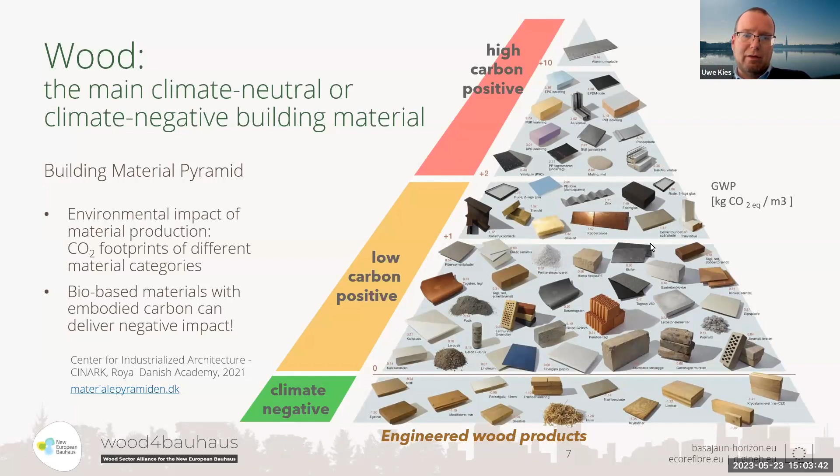So if you compare the timber-based engineered products with traditional materials regarding this global warming potential, you can see that timber products can be even considered climate neutral or even climate negative building materials. So this is a very well-known building material pyramid published by the Center for Industrialized Architecture, which really compares all sorts of materials in a common methodology.

And thinking then one step further, wood products, if we would include much more wood products in the built environment through this kind of long-life wood products, timber buildings, all sorts of products that can be integrated in the construction of buildings, then this whole value chain from forests to the built environment can become a major carbon pump. And this is the concept promoted by Professor Schellnhuber, who's the founding father or the mastermind behind this New European Bauhaus.

So the specific role and advantage of wood-based products. What you also can see on this slide is that to make this supply chain work from forestry to products and in the end the built environment, we also need digitalization as a key aspect to connect all the steps in the supply chain.

And thinking even further, here we are talking mainly about building industries and the construction sector, but to renew our cities, we also have to, sorry, there was a skip. We also have to interact with all other actors in the built environment: architects, urban planners, cities and regions, the decision makers, and so on, which is really the Bauhaus idea, that we have to co-create across a whole ecosystem in the built environment.

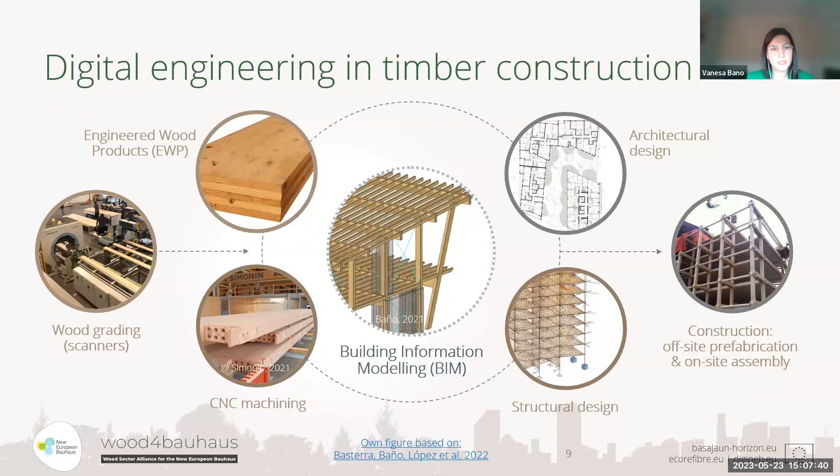Nowadays, the BIM tools designed for timber construction are also connected with other BIM or digital tools in the architectural, structural design, and also in the construction phase, and even connect with other fields such as electricity or plumbing and installations for buildings. So this is what our speakers will present today from what they usually do in their companies. Okay. So I think we pointed out a little bit the role that digitalization can play to really link all these different fields in the wood sector.

And just to come back again to this big picture, the New European Bauhaus was initiated by the President of the Commission, Ursula von der Leyen, and already in her State of the Union address in September 2020, she mentioned this phrase: "We know that the construction sector can even be turned from a carbon source into a sink if organic building materials like wood and smart technologies like AI are applied." So this really captures the connection of digital tools and bio-based materials for this green transformation.

And just to close, this statement from Professor Hans Joachim Schellnhuber: reforesting the planet and retimbering the cities, that is the goal. Timber construction is a true silver bullet for climate change.

So with this, I want to welcome again all our speakers, and we'll now open the presentations. Our first speaker will be Albino Angeli from X-Lam Dolomiti. Thanks a lot. Yes. Albino Angeli graduated in civil engineering from the University of Trento in 2005, and he has been working in the field of timber construction, both as technical manager in companies of the sector and as a freelancer. From 2005 to 2015, he was technical manager at Rothoblaas, a company specialized in steel connectors and solutions for the building and construction industry. Since 2015, he has been working at the Paterno Group company, X-Lam Dolomiti, in which he now holds the role of chairman and CEO.

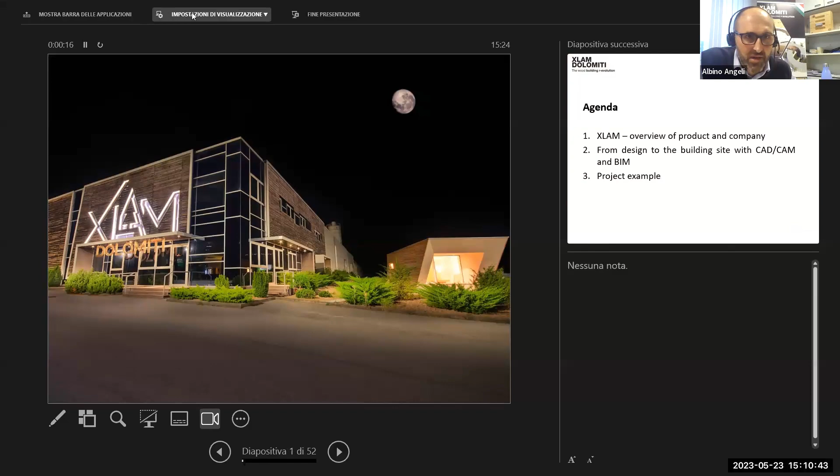Thank you very much, Vanesa, and hello, everybody. I'll try to show my screen. Okay, give me a second. Okay. Do you see my screen? Yes, we can see it, but we can also see the other slide. So, Albino, you should present most probably the second screen. Okay, I'm looking at the other. Okay. Yes, thank you. It's okay this way? Yes. Okay, thank you very much.

It is perfect. Hello, everybody. In my presentation, I will show you some examples of digitalization in some real building sites. In particular, I will give a very short overview about the company and the production of what we are doing, but I want to go immediately to showing you some real projects, designed, produced, delivered, installed, and in one case finished, like a builder, where we use the most advanced digitalization that is available on the market in this moment, I hope.

Production. We are a North Italy producer of CLT. This is our capacity, more or less 300,000 square meters. We are producing mainly cross-laminated timber. Cross-laminated timber is a panel where the lamellas are close together, and the dimension of the panel is coming from the press dimension. But after the press, the logistic issue is the main element that defines the maximum length and width of the panel. We are working with glue without formaldehyde, polyurethane glue, according with sustainability chain PEFC in Europe, and we have the CE marking according with the ETA.

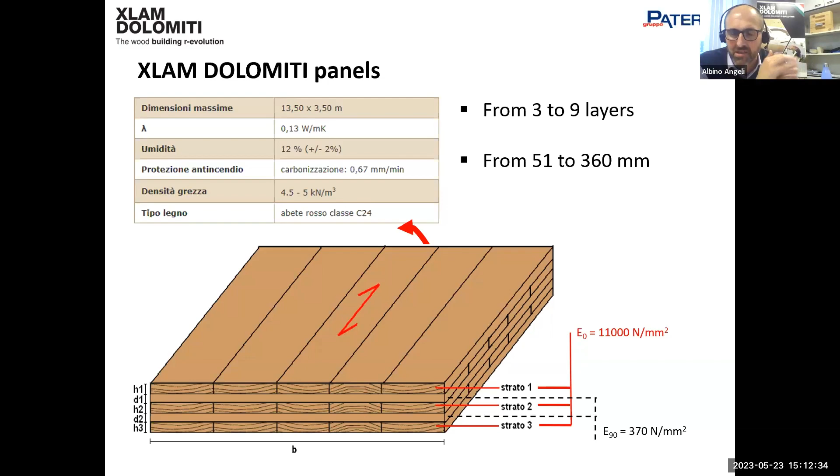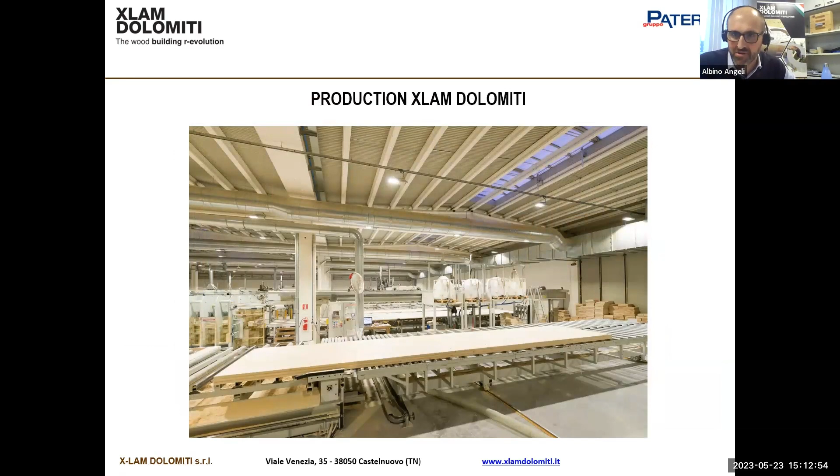CLT is a big panel from 3 to 9 layers, from more or less 51 millimeters until more than 300 millimeters, and is glued together using, in our case, polyurethane glue and a hydraulic press in the factory, and CNC machinery. And here we start talking about digitalization, starting from the CNC machinery, because all the elements go through the CNC machinery, and all the elements go to the site with a tolerance of 1 millimeter. For this, what I draw, if I draw well, is what I get on site. And I want to show you a lot of different examples.

The design. Usually in our factory, we start the tendering process, the quotation, using BIM. In our case, it is Revit, and we draw all the structural elements with, in some cases, insulation, with windows, with everything. We started to develop this in 2014, before my arriving here, to ensure that all the quantities and properties of the elements that we draw in the tender phase are right. What we draw is what the company really quotes for the tendering process.

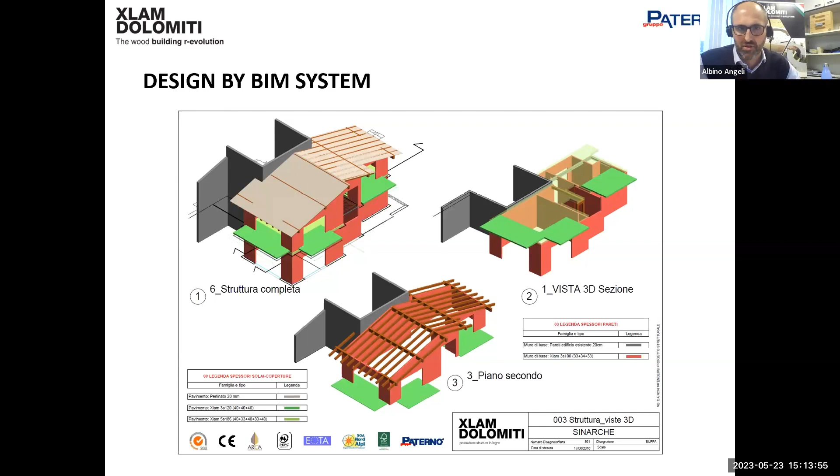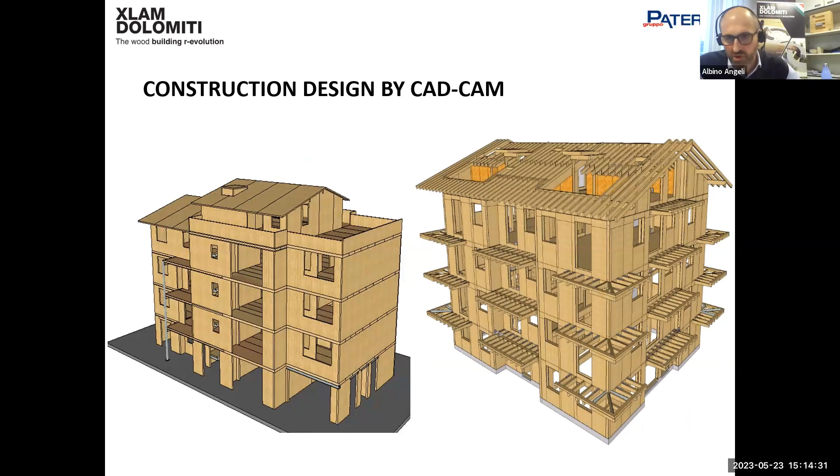After that, the structural design, the finite element model. Italy is a seismic region. For this, we do the seismic design with finite element model software. But this is outside of the BIM and outside of the CAD/CAM modeling today. It's another software that we are using, outside of what we use to draw the building. And we usually define a CAD/CAM model. We are working with Cadwork and with hsbCAD. We have 2 different software for the CAD/CAM.

And from the CAD/CAM to the installation drawing, because our system, the CLT system, is like a big Lego system on site. And like with Lego, when you play with the children, you have the information on how you have to build the helicopter or the car. In our case, it is how you have to build your house or your multi-story building. From this, we have to produce CLT panels on a rectangular element, the master panel, where the goal is to have as little waste as possible. For this, the optimization in this phase is very important: the structural engineering and construction engineering together with the optimization of the production process.

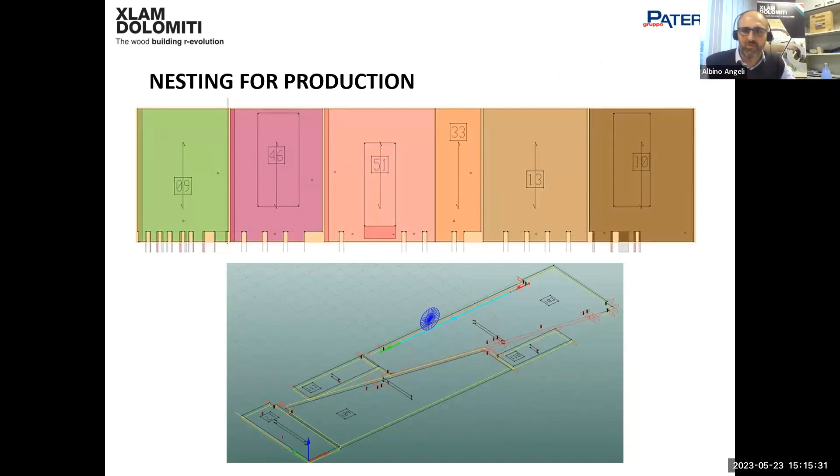For example, the first step of the digitalization, our step 0.1, was that we developed our own app, where taking a picture of the QR code that you find on the label on the panel opens the IFC file with a different color on the element you took the picture of. This is very good when you unload the truck. You have all the elements, and the carpenter and the installer can see exactly where this element has to go inside the building site space. It's not only CLT, because we have to talk about insulation, installation, windows, and everything, because every time we are managing timber, but really the building site is not only timber.

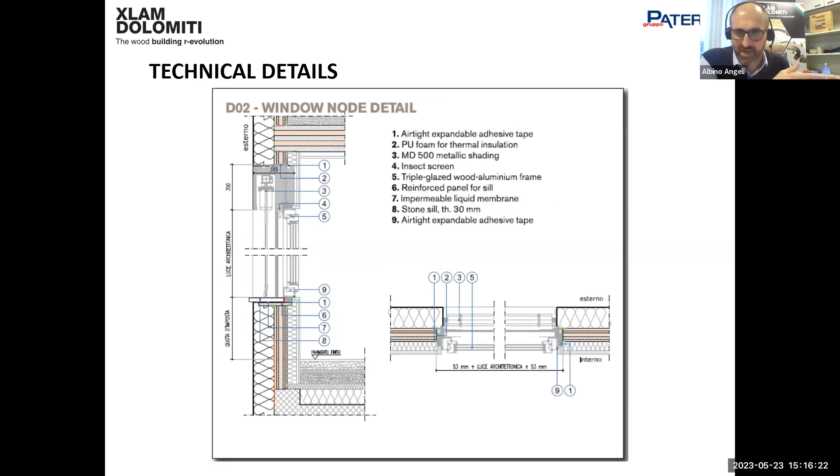And this is the focus of my presentation today, not only talking about the timber. We have to define a terrace detail with membrane, with the property of this element, how you can check on site the quality of this, how you can check the quantity, and so on.

For this, I want to start with an example that we are now on site in Trento, where in this project X-Lam Dolomiti became the builder. We are doing a full turnkey building with installation, with insulation, with plasterboard, with everything, okay?

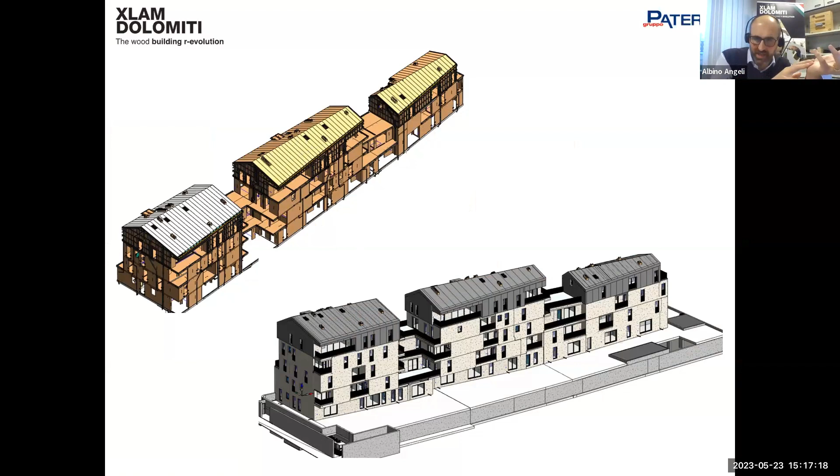And we start to develop a CAD-CAM model. With the CAD-CAM, we import to Revit, and we build all the cladding, all the installation and everything in Revit. The timber is drawn with CAD-CAM, because today there is no BIM software that can communicate very well with the CNC machinery where we cut the timber. So first we build up the model with CAD-CAM, we import in Revit, and we start to draw all the elements using Revit.

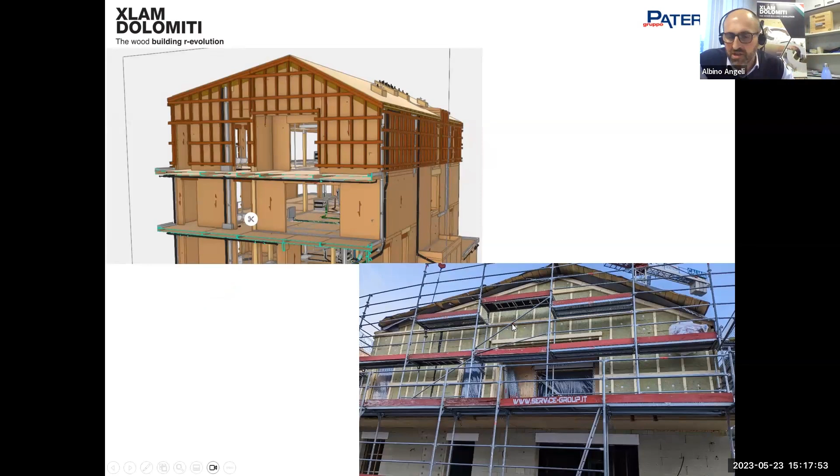Here you can see some images. You can see the installation inside, and you can see a ventilated facade with an aluminum cladding outside. You can see the image, and you can see the site. You can see, in this case, outdoor steel elements around the windows because we need some support with a metal element, how it's drawn, and what you get on site.

Okay. In our case, we found an installer that is working with Revit. So it's not only the architect, not only the engineer, not only the design team, but in this case the company that does the installation on site is working 100% using Revit. All the files to go on site are built in Revit, and it's unbelievable.

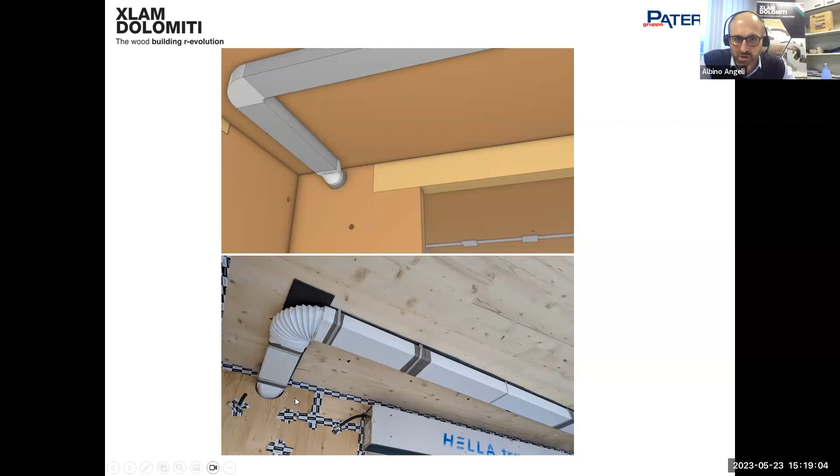You see the installer that looks at the pipe, looks before at the tablet, and looks at the real thing. They're doing the installation using a tablet and not using paper with something drawn on the paper. And you can see what we draw in the model is what you have on site. It's exactly the same. This is on the roof, down to the roof.

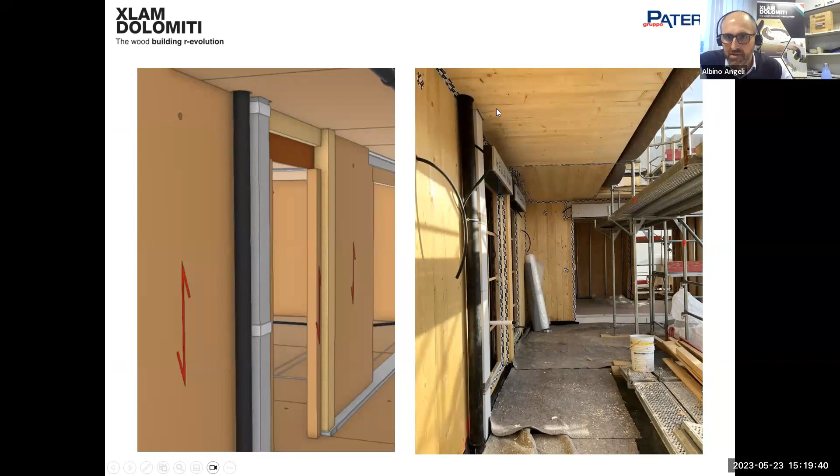There is some pipe going outside to the roof. This is the design. This is the picture of what really happened on site. Nothing was different. It's more or less 100% the same. Here you can see in the model a round pipe, a square pipe, and you can see exactly what you get on site. In this case, you see the connection, you see the hole, and you see what we really have on site.

What I want to show you is that at this moment, all the supply chain, all the actors in timber construction have to go in this direction. Because if only the timber producer is using CLT, glulam, LVL or whatever, using these digitalization instruments, but the others after on site don't use them and are not able to manage, this is today the very big limit of our technology, and where we have to invest a lot, because a lot of general contractors and installers don't use these tools. We don't have 100% of the advantage of digitalization on site.

This building that I show you now is 36 apartments that we deliver to the client finished in less than 10 months. It's not a huge quantity of apartments, not a huge project. For Trento City, it's quite a good project, with the developer, but in less than 10 months it will be finished, okay.

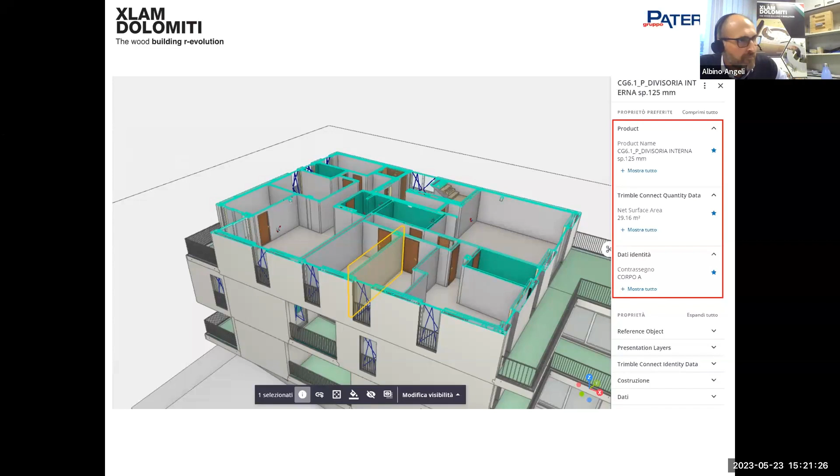Here you can see the plasterboard, all the information. When we work with the plasterboard company, we give them this file, they extract all the plasterboard walls, all the plasterboard floors and so on, with the property, the quantity, what they have to do, and that is what we ask of our supplier in this case. This is just the project that we are now on site.

I'm trying to find some other projects that we did around the world as part of the digitalization in the last 3-4 years. I was not able to find a lot in Italy, because in Italy the projects are quite small and nobody is investing a lot using BIM, using Revit, maybe ArchiCAD, or other kinds of BIM design. And many times they use it just to have a BIM label, but really they just build up a model.

For me, that is the team of architects, engineers, and the people that design the installations. But really they just do a model, and afterwards nobody follows this model. On site, nobody follows the model, so you have a BIM design, but not a BIM process from the design to the site to after the design, when you give this model to the client and say this model is what we really did on site.

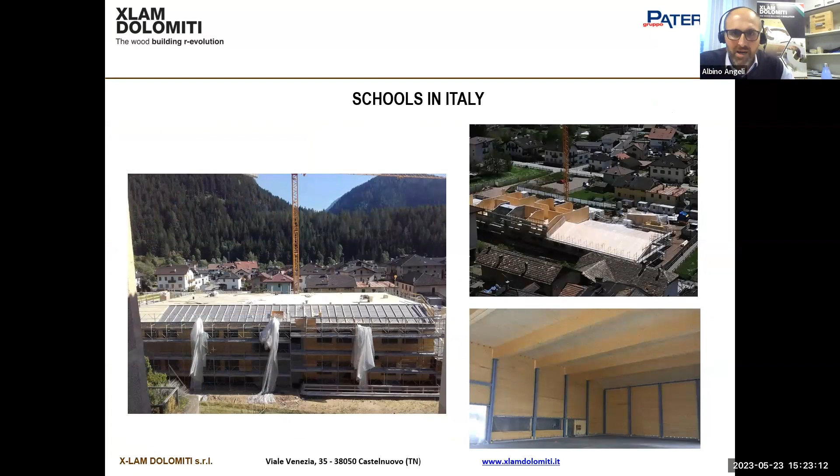What I want to show you is that the architect won the competition because it was made with a BIM design. You see the BIM design of the school. This is a very good BIM model, and they did the tender with the BIM model. When the construction company, in this case a big local general contractor, did the project, no one followed the BIM model designed before. What I want to explain is that the whole chain in the construction sector has to go in this direction. Using timber construction, it's easier to close the process 360 degrees. Using other technologies, it's a little more complicated.

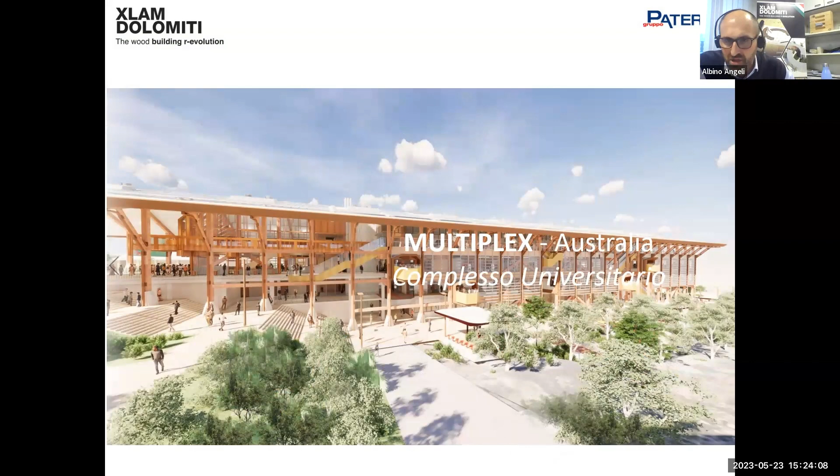Another example is our last project that we finished in Australia, a university, Murdoch University in Perth, quite a big project. We did all the design in Italy, but first we had a BIM model with all the installations inside. So it's quite easy to export all the elements and work in CAD/CAM. You can see the bracing, the glulam elements in the design, and what we got on site is the same.

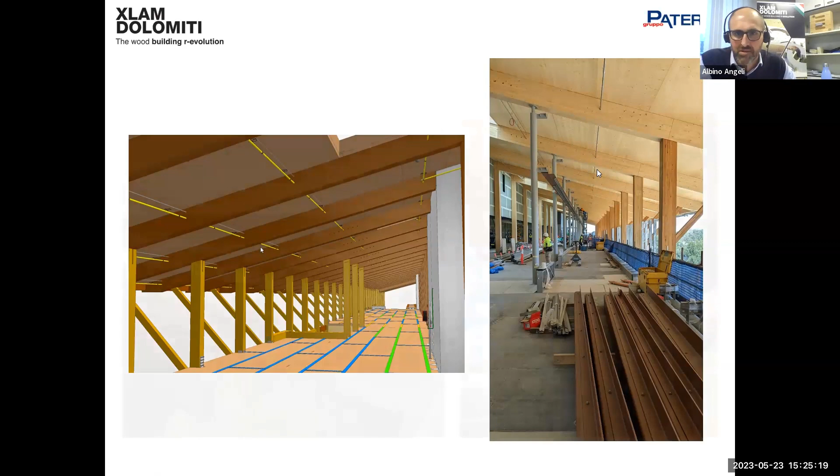For example, a very simple connection, where in the model you have all the elements, the quantity, the characteristics of the elements, and so on. For the installations, you can see the pipes drawn in our model and the picture from site with the pipes in the same position. In very big projects, in particular outside Italy, I don't know about Spain or other countries, but in Italy companies and investors use the BIM concept only for big projects. Here you can see the finished structure with all the installations we drew before in the right position.

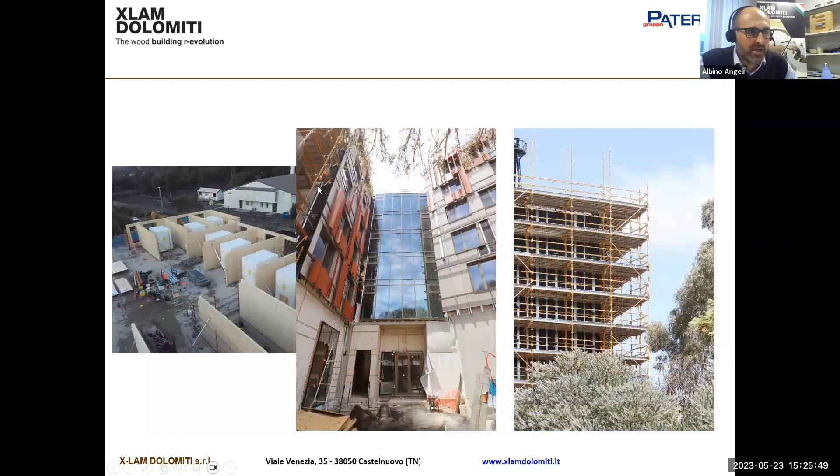Another project, in 2018 in Australia, is a student accommodation. In this case, the architect gave us a BIM model from which we exported the CLT panels for the design. We developed our whole BIM 3D model. There are some finished rooms made in Melbourne. But in this case, after the architectural design, on site nobody used Revit, nobody used this system. This was another example in Australia, 36,000 square meters of CLT.

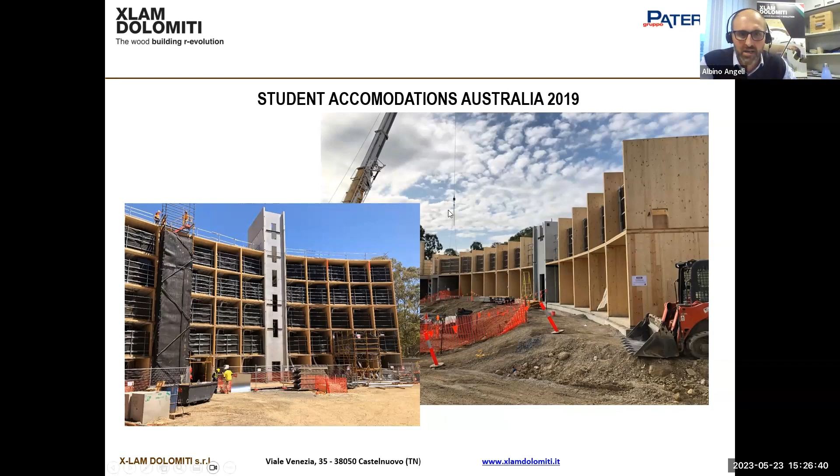In this case, the BIM model was very useful because we started from the Revit. The Revit was made by the same architect of the previous project; we already knew each other. The BIM model was made very well, and thanks to this we reduced a lot the time on site and the waste of time on site. You can see some pictures of this.

The last one is a 10,000 square meter office building. In this case it was the same. We were assigned the BIM model, and we developed all the construction drawings using CAD/CAM, taking them out of the model, in this case Revit.

Finally, from my point of view, I want to do a 2 minutes summary. What we have to develop is the mentality of all the supply chain, because the timber structural sector is already ready for this change, because we have already done these things for a lot of years. I think the first CAD/CAM arrived more than 25 years ago, 30 years ago, okay? All the CNC machinery has existed for more than 25 years, okay?

But today I'm finding on site in Italy the windows producer that comes on site and takes the sizing of the hole that we leave on the CLT panel, and doesn't believe that what we design is what they get on site. Okay, and this is a mentality for the construction sector that has to change quite fast. The timber sector can do this. If we're ready to do this, we have a very big chance in this moment. Yes, we have a big chance to explain this to all the chain.

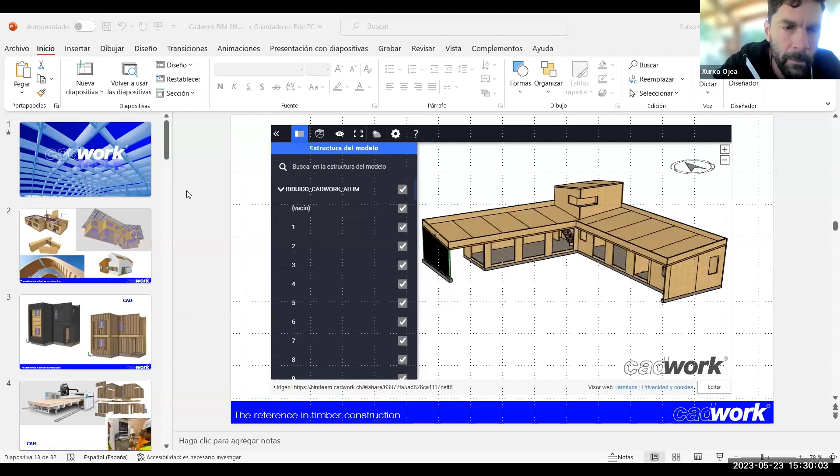Okay. So I'm going to present you a tool that Albino has introduced in a very good way. We are speaking about a CAD, CAM, BIM software specialized in timber construction. We say, what's that? What's a CAD, CAM, BIM? What's the meaning of that? It's a CAD because it's used to design. It's CAM because it's used to export to numerical control machines called CNC machines. And all that is designed using the BIM methodology. For that, we say that it's a BIM software.

In this presentation, I'm going to try to explain the reasons for the existence of a tool like this one. Why does a technical office or a wood housing production company, for example, need a specific tool for this purpose? Or what are the specific needs of a wooden construction project that make it different from other kinds of projects? We are going to answer these questions in this brief presentation.

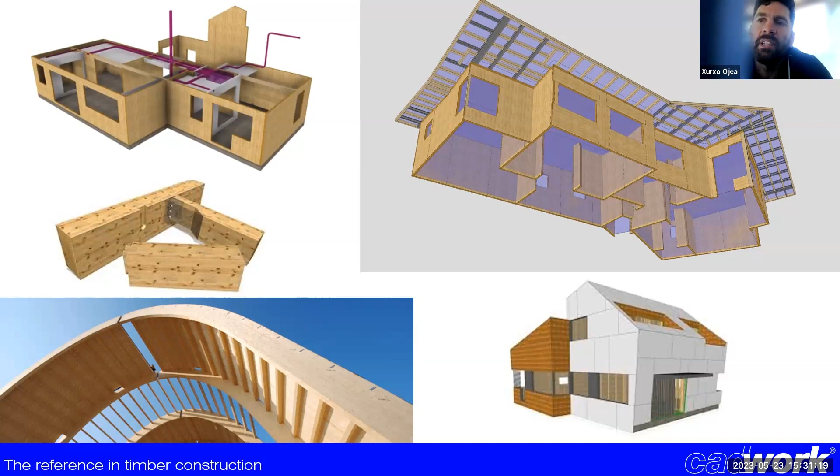First of all, we will try to clarify exactly what a CAD-CAM-BIM for timber construction is. CAD, computer-aided design, is a technology that allows automating the manual process of product design, reducing errors, gaining speed, and increasing quality. Roofs, frames, panel works, CLT, glue laminated timber structures, generating lists, generating shop drawings, all these are processes that need to be automated. In industrialized and modular construction, we will try to find the biggest degree of prefabrication possible.

What's a CAM software? This kind of software allows exporting the designs to a numerical control machine. Cadwork will export its designs to all specific timber frame CNC machines. We will show some examples later. What's BIM, Building Information Modeling? It's a collaborative work methodology for the creation and management of a construction project. A BIM software allows you to create and manage this 3D model in a very specific way, so all the agents of the project can use this same model.

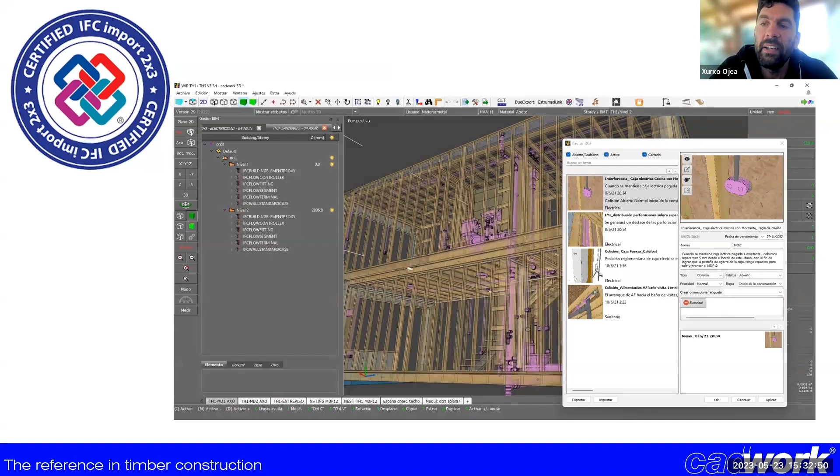I'm going to explain all this using this example. Here you can see the screen of our software, and here the example of a timber frame house. I have just activated an element of the house, a wood stud of a timber wall. It's marked with a blue arrow in the center of the screen. As you can see in the window marked with a red square on the left side of the screen, we can see directly the section, the length, and the position of this element, but the direction of its axis too.

It is very important to know the grain direction of the wood, but also its color, material, overall dimensions, which wall it is part of, which floor, which building, and with which elements it's in contact to define its ending types. For example, the joints between beams, like tenons, mortises, dovetails.

And so, knowing these values, we can know what its weight is, its center of gravity, its real volume. For example, how many pieces of this section there are in the project, how many walls, how many square meters of OSB panel we have on the first or second floor. What is the volume and price of the insulation for this project? Or how many kilos of steel do we have in the metal connectors?

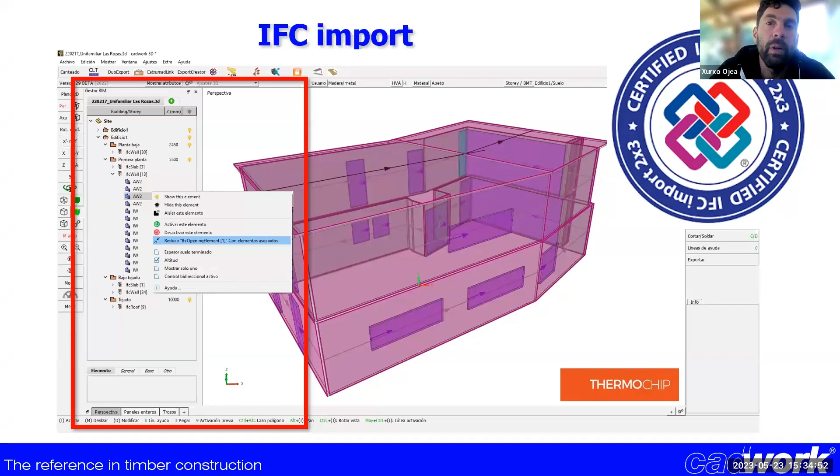We only had to shape all this information so that we were recognized by the buildingSMART association as certified BIM software. Therefore, it's enough to slide an IFC file with BIM format onto the CAD screen so that we can absorb all the necessary BIM information and begin work. Once this BIM has been imported, we begin to work.

We design to build. We add construction elements, most of them specific to timber construction, like beams, panels, plates, screws, fitting installation axes, as Albino has shown before, metal connectors, etc. All thinking about the production and assembly of the structure. This is the difference between us and a simple design software.

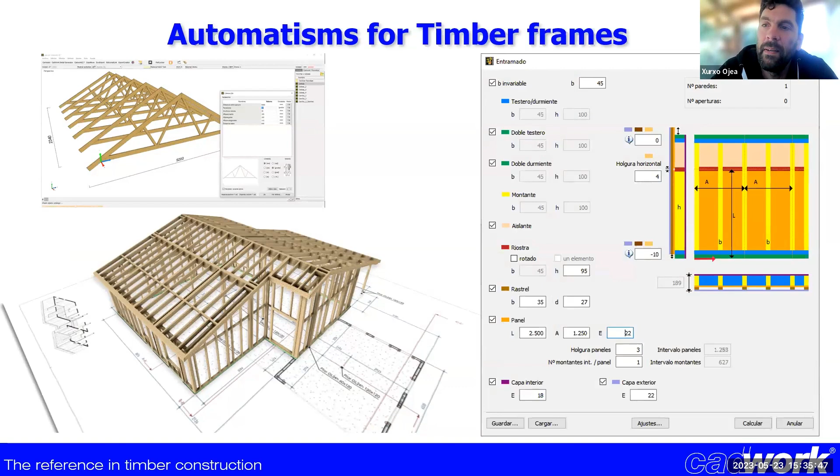For the wood frames, for example, we are equipped with automatisms for the design of the frames. For example, distance between studs, which depends on the dimension of the structural panel used, vertical and horizontal gaps between panels, whether we want to materialize the insulation or not, etc.

And since we are talking about timber structures, it's essential for us to be able to define exactly the kind of joints between elements. Wood-wood joints, like tenons, dovetails, half-laps, etc., or metal joints, like commercial metal joints, lag bolts, screws, etc. All this information will influence the production of the timber elements, ready to be manufactured with the help of shop drawings or CNC machines.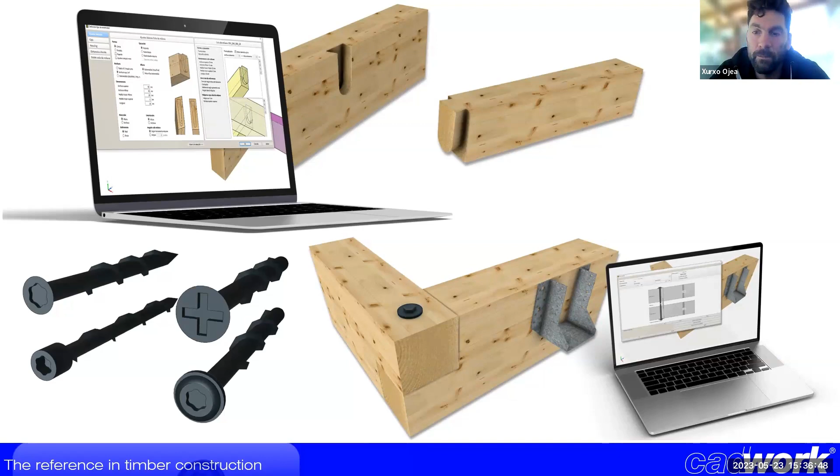Sometimes, as Albino has shown us, there are extra elements like the installations, which normally affect the elements of the construction. How? For example, some parts will have to be moved, and others will be drilled or machined by the CNC machine, and we have to measure the linear meters of installation, for example, or the machining hours.

We have already finished the complete 3D models. You can see an HTML file created from the software. And now, what shall we do? The 3D model is in my computer. How could I share all this information with all the other agents of the project? Well, we begin.

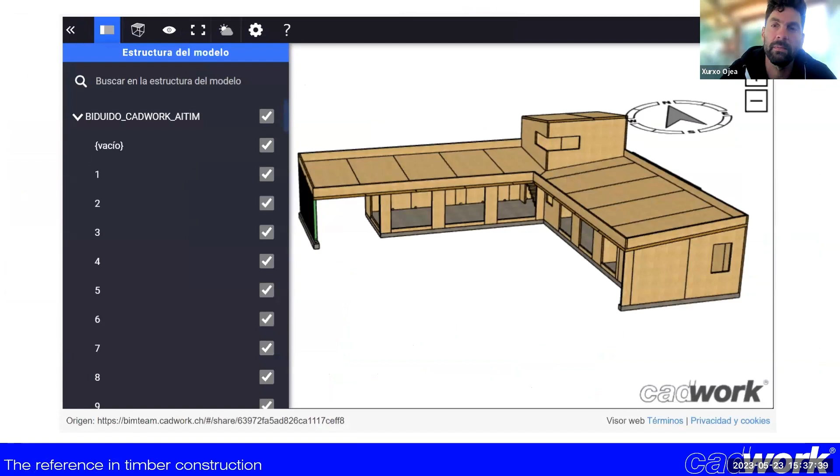Step 1. We number each element and generate the list of materials of all the elements that we have designed. Linear meters, square meters, cubic meters, kilograms, units, prices, all are in lists ordered by sections, materials, walls, height, buildings, stories. We even need to know the list of raw bars we are going to need to obtain a minimum waste of wood, for example.

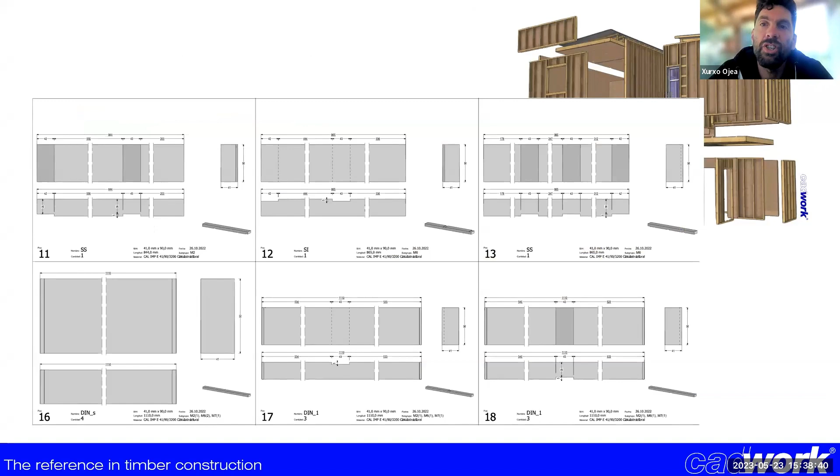Okay, we already have the number of pieces. Now we need to manufacture them. We obtain the exploded views, a shop drawing of each piece, fully dimensioned, with all its cuts for its manual manufacture, or a shop drawing of each wall, also automatically dimensioned, with all its layers if we are speaking about a framed wall, or a shop drawing of every CLT panel, or even a plan of each facade or of each assembly group.

And as Albino has told us before, for CLT panels or other kinds of panels, we need a nesting calculation. What's that? For certain dimensions of raw big panels, called master panels, we will need to put the project panels into them, so the waste will be as little as possible. In this way, we will really know how many square meters of panel we have to manufacture, and the order to the CNC machine will be done.

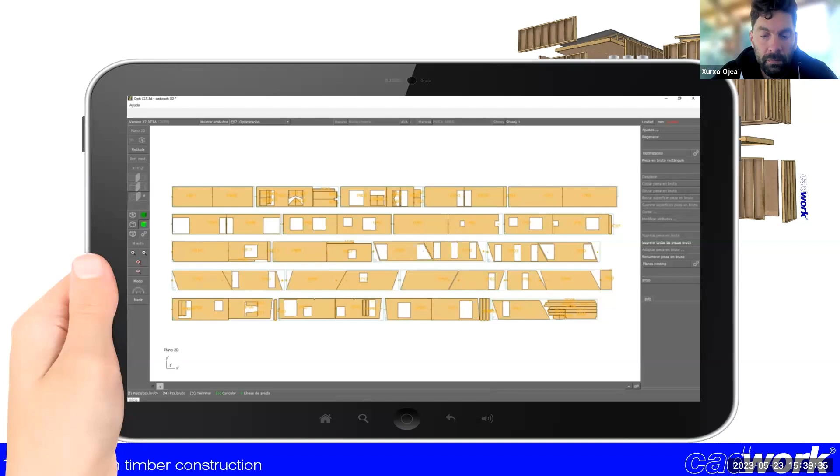And of course, the assembly plans are essential. We have already manufactured the beams and panels, and now we have to put them together with the help of these general shop drawings.

But there are more extra and necessary tools. We need to know, for example, for the CLT panels or the timber frame walls, which are the anchor points for the lifting in the manufacture or in the transport and unloading on site, depending on their center of gravity. That's what CADwork takes care of.

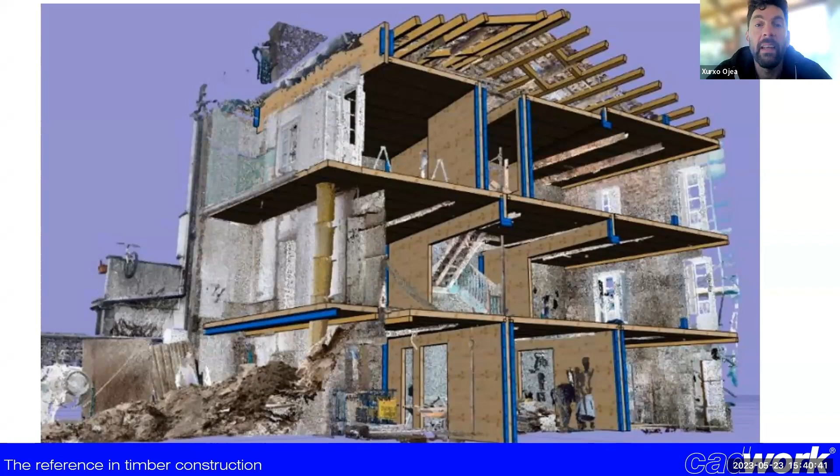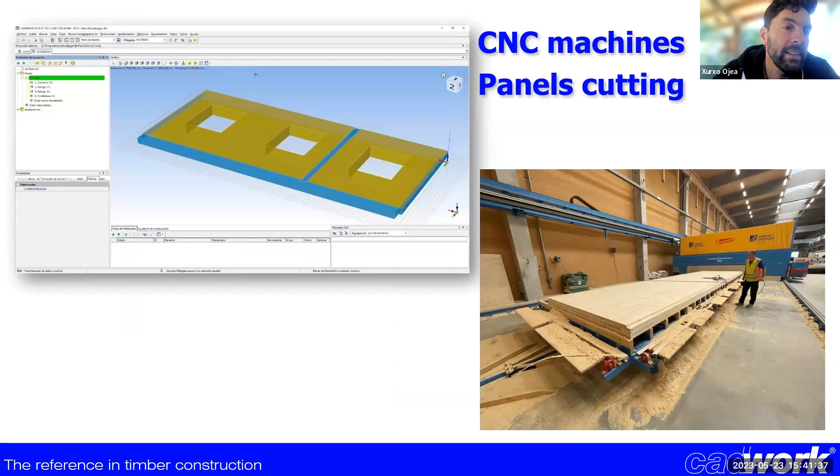Second, CNC machines for cutting panels, normally CLT panels, designed specially for machining large panels or curved, even laminated beams. A third type is called multifunctional bridge, or CNC machines for the assembly of timber frame walls, of which there are more and more in Europe.

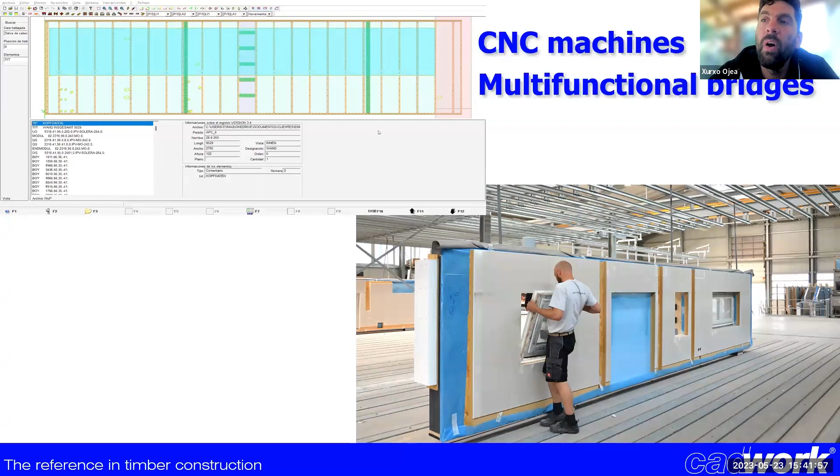CADwork is in charge of telling the machine software where the pieces of the structure go, how to place the panels, how to make the perimeter cuts and the cuts of the doors and windows, with what tool, etc.

Okay, with the finished and machined structure, it's time to load the truck, for example. If they are bars, no problem. But what happens if they are big CLT panels? There isn't so much room anymore. CADwork has a tool that loads the elements onto the truck. You only have to give the dimensions of the box, decide in which position the elements are going to be placed, if they are standing, lying down, etc., and if we want to group certain elements or not.

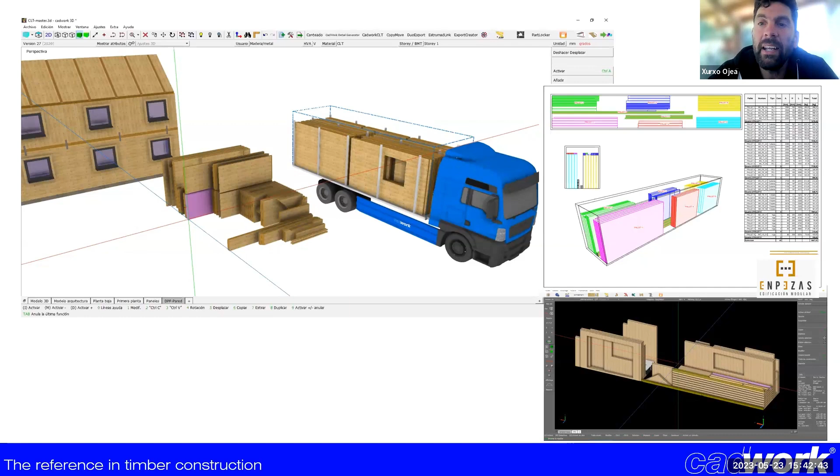To transmit this information to our customer or to the assemblers, we can use the HTML format. These files can be opened on any device. We can add an assembly diagram step by step, and we can read the QR code of any part, as Albino has shown us, and obtain information about its position in this simple model.

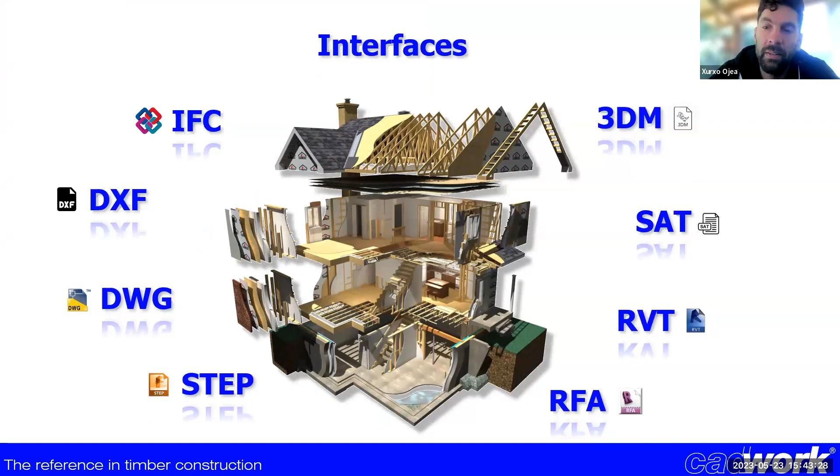We need to export and import to almost any 3D and 2D format, not only to the IFC format, but to many others. The most common are on the screen. Don't forget, we are working in a BIM system, so we need to export our model to the IFC format, so all the agents of the project can use our work.

We can export our model selecting a defined level of detail. So we can decide, for example, if we want to show or not the end types, tenons, mortises, or dovetails, or if we want to show the nuts and washers of the bolts, etc. Rhino inside CADwork is a tool that allows us to embed Rhino 7 in CADwork 3D, so we can take advantage of the surface model in our CADwork 3D environment.

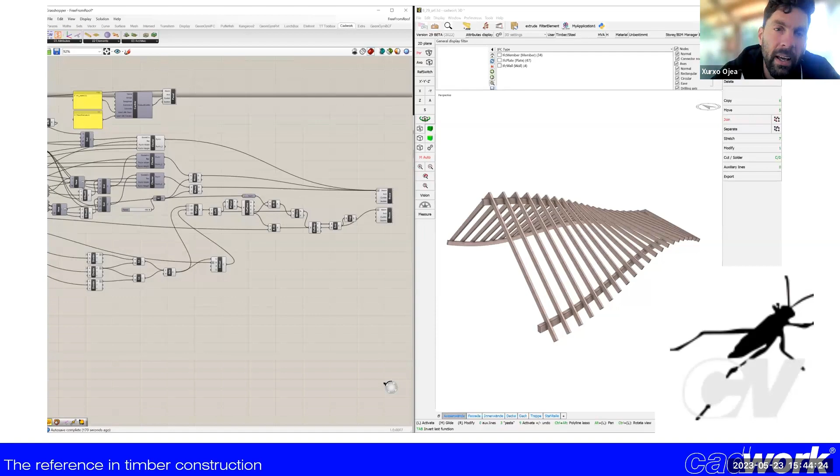In short, wood construction predates any other kind of construction. It has never stopped being built with this material, and it seems that in the future it will be used more and more. Tradition and technology come together in each of the wooden projects built this century. Building in wood is building the future for our children.

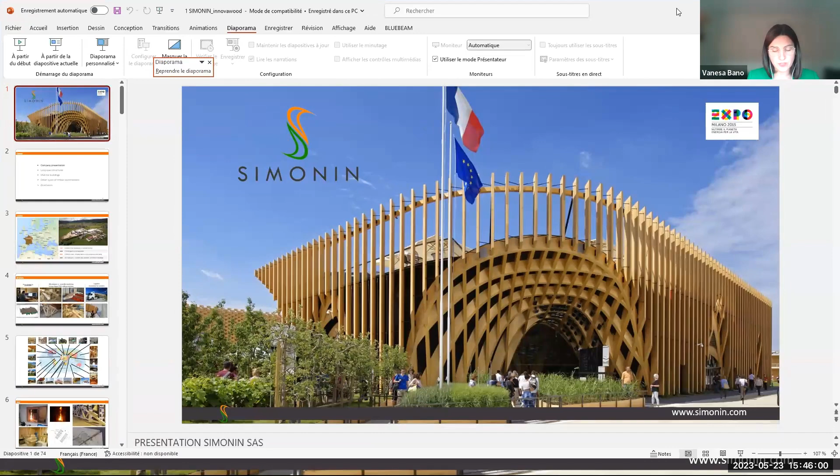And now it is the turn of Jannick Jahnke from Simonin. He's a timber engineer with a passion for timber who began working in the industry over 10 years ago. His fascination with wood has led him to pursue a career that incorporates both his expertise in joinery and his background in timber engineering. As a structural engineer and technical sales professional for Simonin, a French glulam manufacturing company, Jannick has found the perfect outlet to combine his mastery of precision joinery techniques with his knowledge of building structural analysis, which he gained during his master's degree in 2016 at École Supérieure du Bois in France.

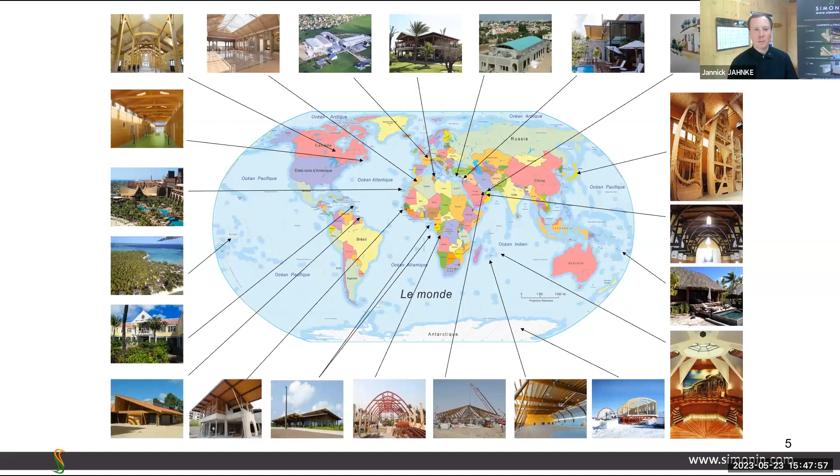Simonin is a company which is based in France and exports all over the world. Here I've got a few examples of projects which have been built in the past. When you do such kind of projects and especially ship them all around the world, you expect the materials to be of quality and to last where they should and how they should. That's why research and development as well as quality control are central items.

For curved pieces, the process is pretty similar. You use thinner lamellas, which are then bent, shaped, and glued to get the special shape and curve.

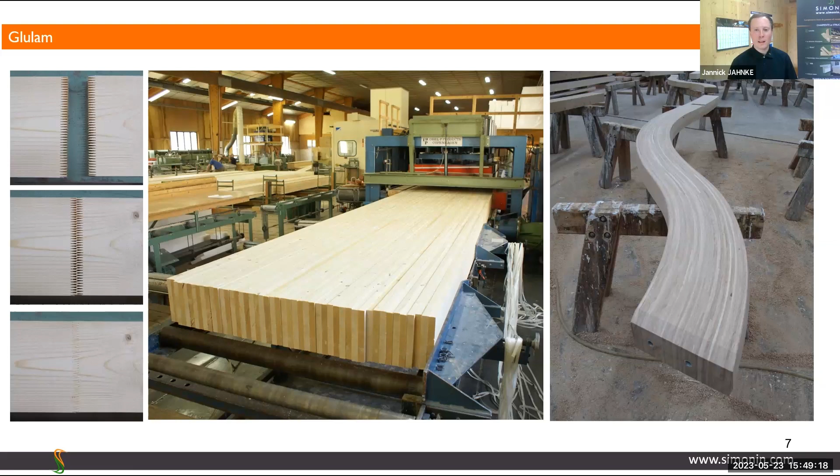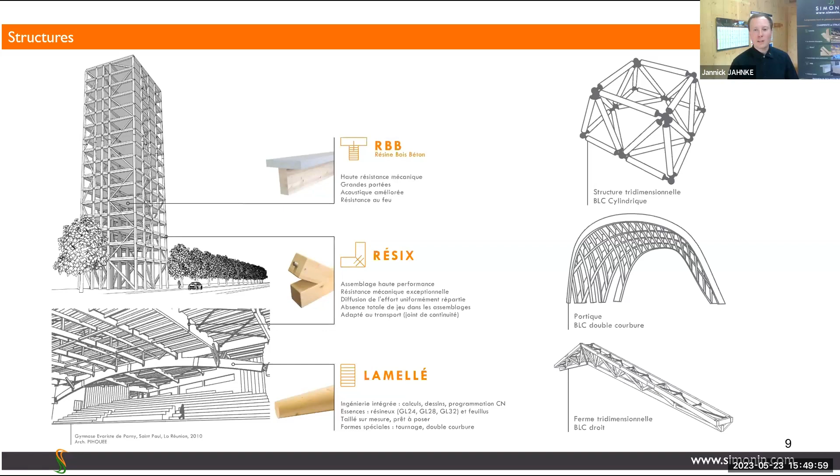Of course, in timber, there's always one topic, which is fire. That's the first question which is usually raised. And in fire, there are 2 things to remember. There's the fire resistance, which is counted in minutes, and the spread of flame, which is how a material behaves in case of a fire.

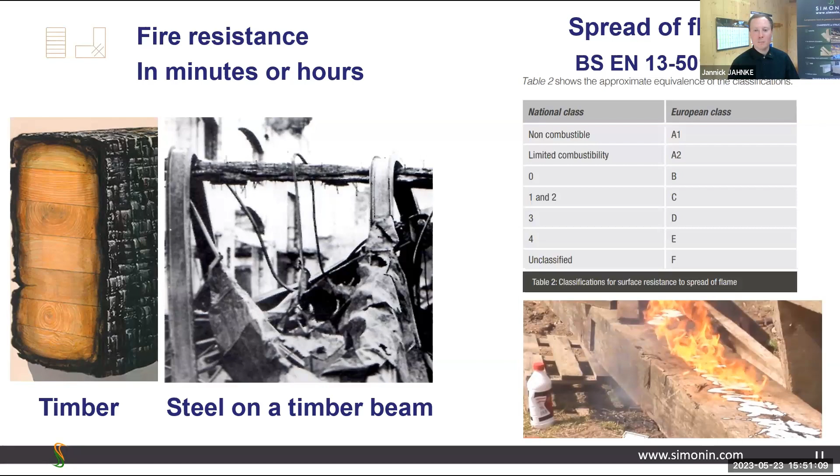On the right side, it's something else. It's the spread of flame. It's the Euroclasses, which say how a material behaves in case of a fire. So, for example, A1 is steel, which is non-combustible, and timber is between D and B, according to the treatment that you apply on it.

So when you apply that on a building, you've got, for example, a timber floor and a timber ceiling. You want this timber ceiling to resist so that when you have people on top of it, it should resist for, for example, 1 hour. That's what you can calculate with the charring layer on a timber beam.

And then you've got the cladding on the wall, where you're looking not for resistance, but for spread of flame. That means how will it react in case of a fire? Will it ignite or not? And that's something we can achieve with treatments or natural products such as larch or the timber species.

From fire, we will also go to a type of connection, the glued-in rods, which is a type of connection which is embedded into the timber. As we've seen before, when you have a piece of steel, in case of fire, these ones are losing their resistance, whereas when you embed the steel in the timber, you use the insulation properties of the glulam and of the wood to protect the steel connectors inside of the material.

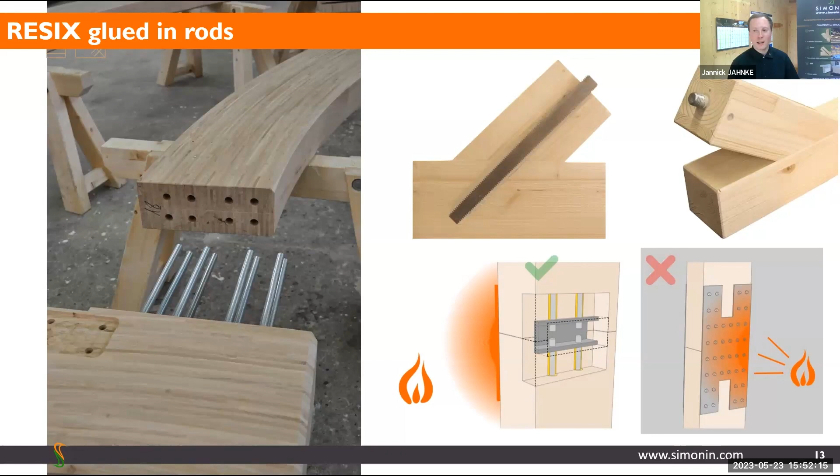Other advantages of the glued-in rods are the pull strength, their water resistance, and the versatility of uses you can have with them. So Simonin uses them quite a lot for export purposes, because we can produce small elements which fit into a container and can then be shipped all over the world to a final destination and assembled on site using simple steel screws, steel on steel.

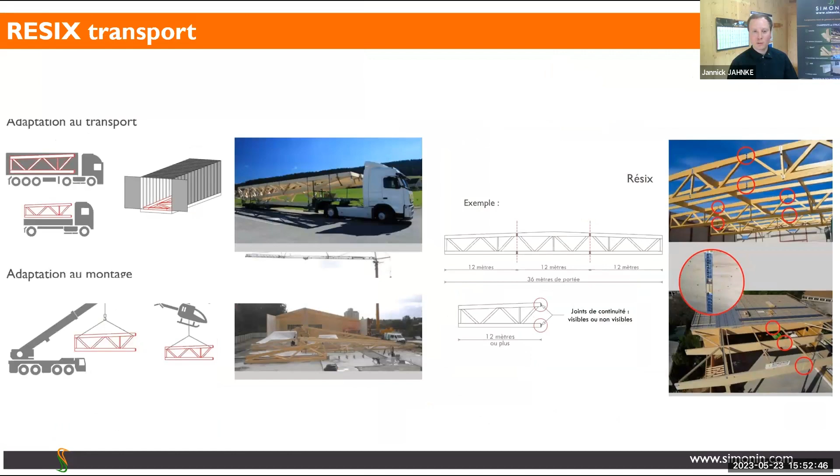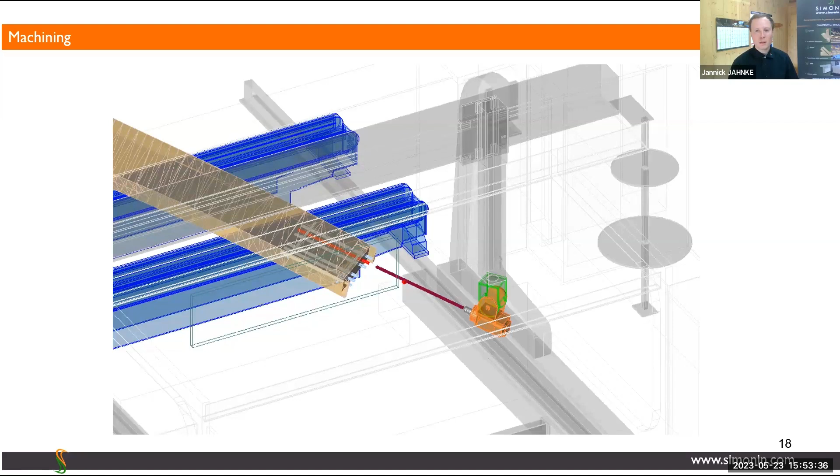Let's move on to the first topic, which are the long span structures. As in every process in the timber industry, everything starts with the 3D model and the BIM software. So all pieces are drawn in the software. Then from there, they're exported on the CNC machine, where we estimate the time of machining and simulate everything. Once the simulation is done, we go to the workshop. Here we have a CNC machine with the capacities. Everything is programmed before and executed on the machine with a precision of about 1 millimeter.

Once every single piece is machined, we move on in the workshop to the part of the assembly, where we have pre-manufactured pieces. That means we will arrive on site with elements as big as possible, as shown with X-Lam Dolomiti, with prefabrication in order to have a good precision. That's what we aim for. And once we assemble everything, we can get structures with a span of up to 80 meters very easily. This span can be achieved with curved structures.

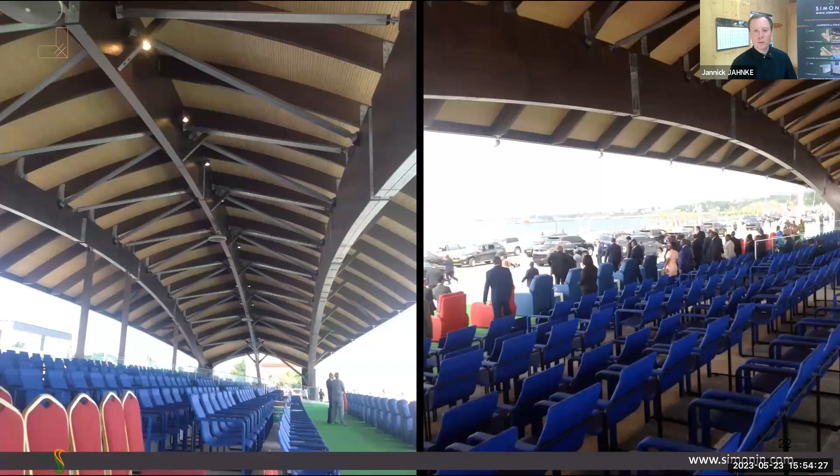From a technical point of view, they are very efficient to cross long spans. So they have a lot of horizontal push on the concrete foundations right and left. That's why they needed to embed steel rods in the floor to hold back the right and the left foundation, to take all the horizontal efforts brought in by this structure. On the right side, we can see the steel connectors, which allow to assemble the 12-meter long beams, which were shipped by container and assembled on site to get the 80-meter arch overall.

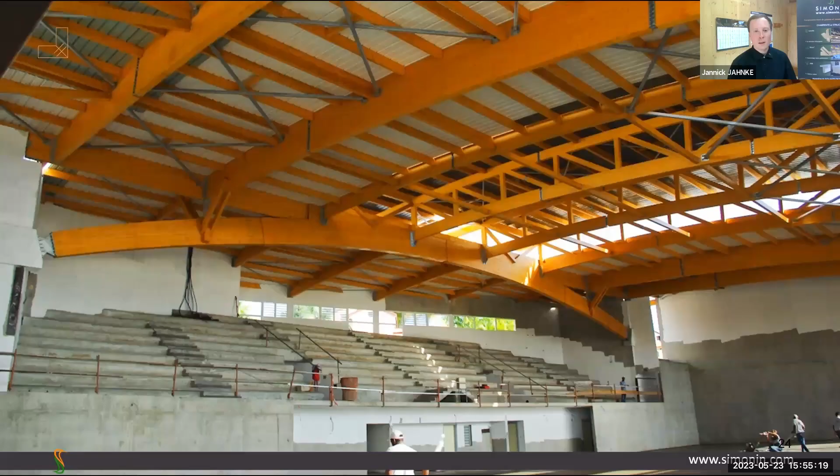Then you can say timber construction has nothing new, and that's what we can see here. That's a building of the 1980s, which has also an impressive span, spanning from right to left with more than 40 meters. Here again, the curves are really useful to have long spans and a lot of compression on the right and left side. This can be used in sport halls, such as basketball halls. This one is in Lebanon.

This building was also made out of timber arches. And here we have an example. This building burned down, at least it didn't burn down. There was a fire inside. The timber has resisted during the time that it needed to resist because it has been designed to. And you can see small steel strips of the steel sandwich panel hanging from the ceiling, but the main structure was still standing and today has been replaced by trusses.

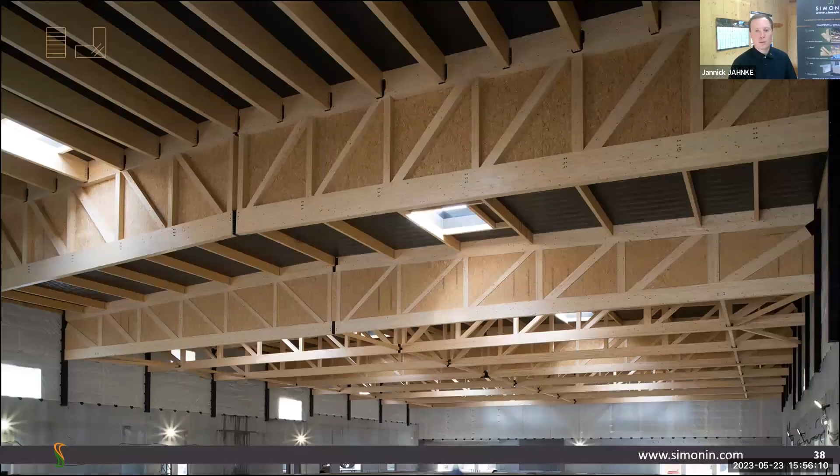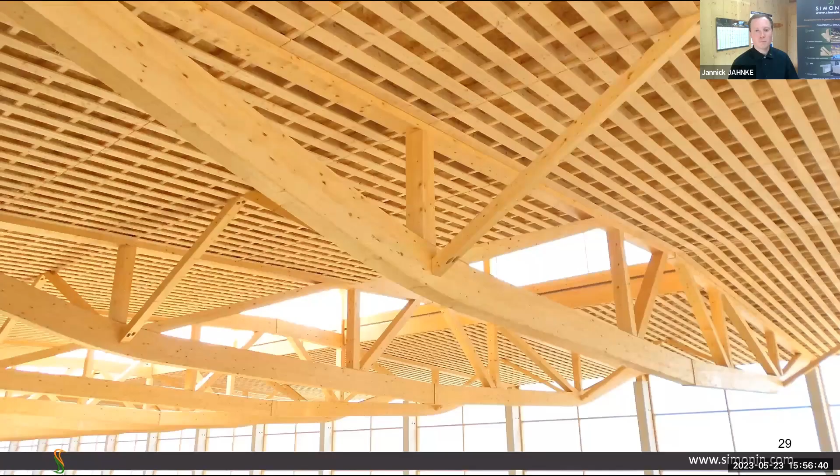These trusses are another useful way to span if you want a flat roof or almost flat roofs. We can span 38 meters using 2 trusses of about 20 meters, which are jointed at the center on site. Another example is this one for a fire station. So firefighters really love timber in some places because the resistance in time is pretty impressive with 1, 2, or 3 hours, according to the design. That's the finished structure with a span of more than 30 meters.

We've got other examples of uses to have long spans with triangular structures. They look really lovely once you have installed a glass roof on top of them. Here we can see the connections, which are all done in the factory and off-site. So this is made in the factory, all assembled, shipped as long elements, and assembled on the construction site to form one truss.

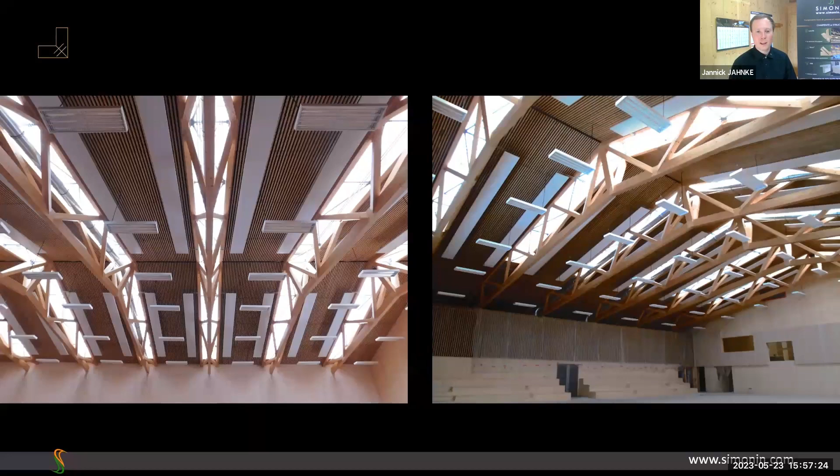And here we have the finished result with the lighting on top of it. Here we have something else with, again, 2 trusses assembled for transport reasons, for a horse arena.

So now we've seen that we have many examples of buildings with quite long spans, from 20 to 80 meters. Above 40 meters, the curved design is pretty helpful, and below 40 meters can be handled with trusses. Once we have the span, there's another topic, which is the overhang. This is also sometimes called cantilever.

So here we have a structure which has 15 meters overhang from the post to the end, and which should resist the vertical forces which are going down, and also the uplift, which is an impressive thing to calculate on structures, because all the connections have to be calculated for vertical loads downwards and vertical loads upwards. That's the inside of the building.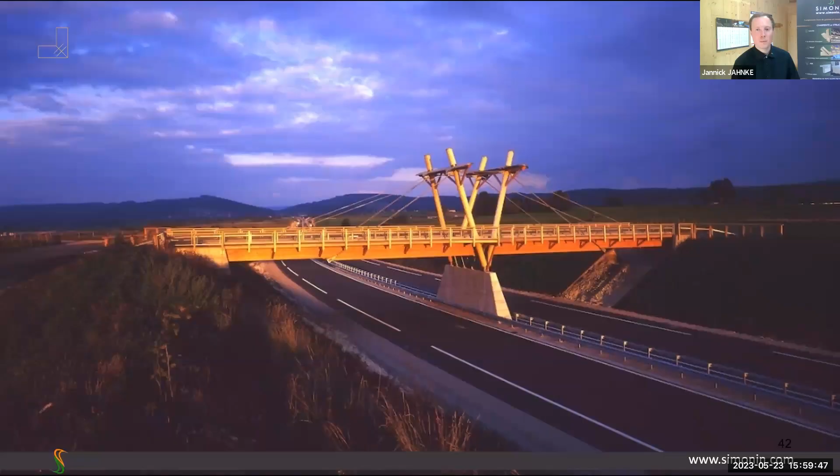Durability in timber is another topic. That's why the bridge is covered, and covered items will have a long resistance and long durability. Here we have an example of a bridge which is designed to support trucks. So it's crossing a highway, and you can drive with trucks on top of these bridges.

Now we've seen structures which have horizontal spans, and we can also apply the same thing vertically with observatories, which have a height between 15 and 30 meters. And the idea is pretty similar. Instead of being horizontal, the beams are vertical and support the same conditions of stress with bending.

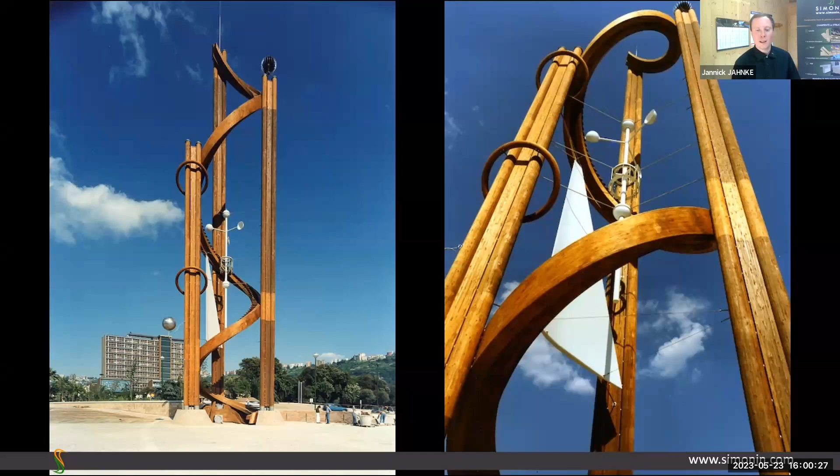Here we have an example in Italy. It was built for the World Cup in Italy in the 1990s, still standing, a large structure. Today it's not this color anymore, it's gray, but it's still standing and doing fine. So if one day you go to Napoli, you can see that in front of the football stadium.

The other topic was the mid-rise buildings. We've seen the towers, and now we'll see this applied to other structures. So we're going to make a difference between the medium-rise buildings and the high-rise. Sometimes people talk about high-rise, but 12 to 39 floors. There are a few buildings in timber going above 10 floors, but usually we're between 5 and 10. That's something where timber is really used, and that's common today in the industry.

The ways to build these projects are different depending on the height and the construction methodology. So we've got the exoskeleton made out of glulam. We've got the CLT, as Alberto showed before in the presentation, posts and beams, and also sometimes concrete cores, which provide the stability of the building.

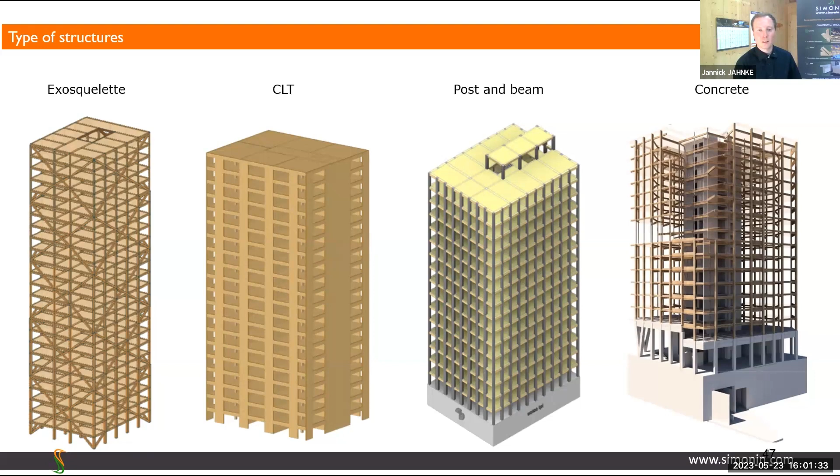One typical way to have the floors made is with CLT, as shown in the first presentation. And then we've got the walls, which can also be made out of timber frame, which makes them a bit lighter and thinner than the CLT versions. I found a map of high-rise or medium-rise buildings which have been built over the past years or which are in projects. As we see, it's something that starts to be common, and I guess in a few years we're going to have some more spots all over the world.

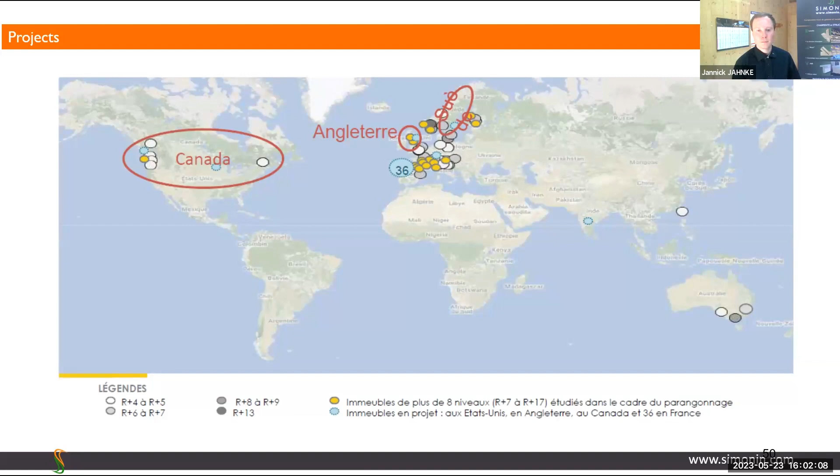One example could be the police station of Monaco. It's not very high, it's only 4 floors, but standing on a timber structure that is more than 10 meters high, to have a road passing underneath, because in Monaco they have really huge space problems. So they start building on the roads, and that's a temporary police station that will be used for a few years while the old one is refurbished.

Simonin has participated in the floor structure or the ground structure, which is built entirely out of glulam, with glued-in rod connections and a fire resistance of 90 minutes. That has been achieved with the charring layer and an additional protection with a timber panel where the steel connections are, to protect the glulam with an additional layer of timber at these places.

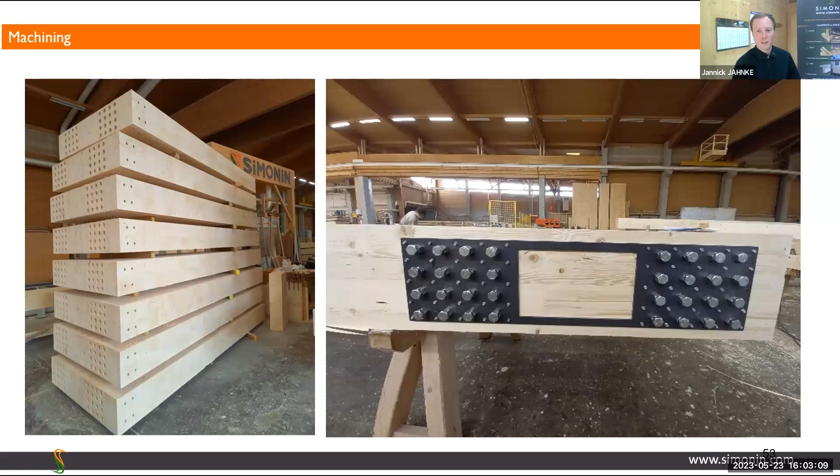Here we've got an example of the beams which are in the factory, with all the glued-in rods which will be injected at all these places to have a moment connection and stiff portal frames. One portal frame can be seen here and installed on site. That's a picture of Ossabois, where they've produced the timber modules which were then installed on top of the structure.

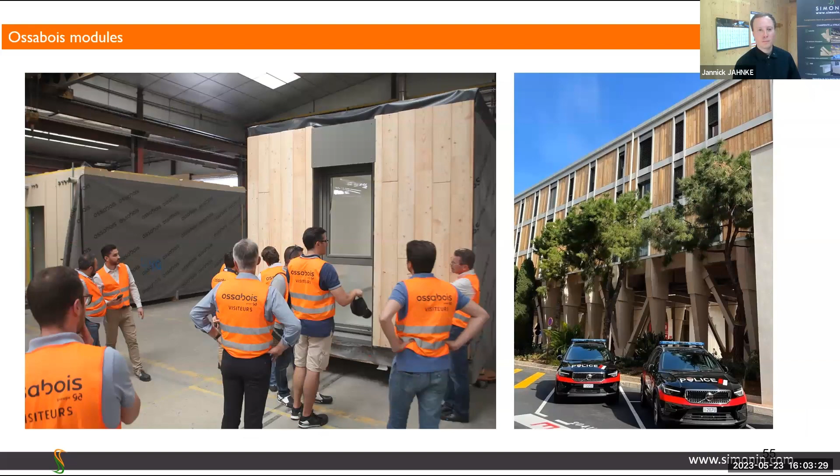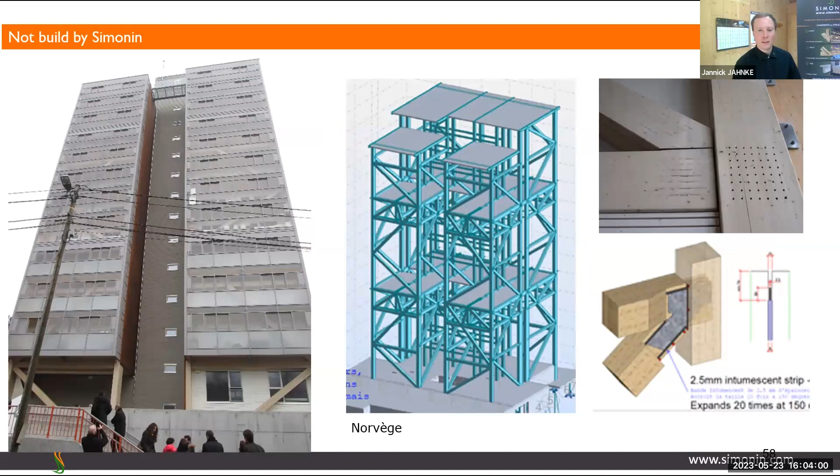Another example, again in Monaco, usually mid-rise buildings are used where space is rare, so this is a good place to be. In Monaco, they are now building another one, which is under construction with a post and beam skeleton. A bit like the Treet in Norway, which was one of the first ones. This was not built by Simonin, and all the bracing is done with timber beams and steel connection plates, as you can see on the right side. It works a bit like the trusses I showed earlier. You can use the trusses horizontally, and you can use them for bracing vertically.

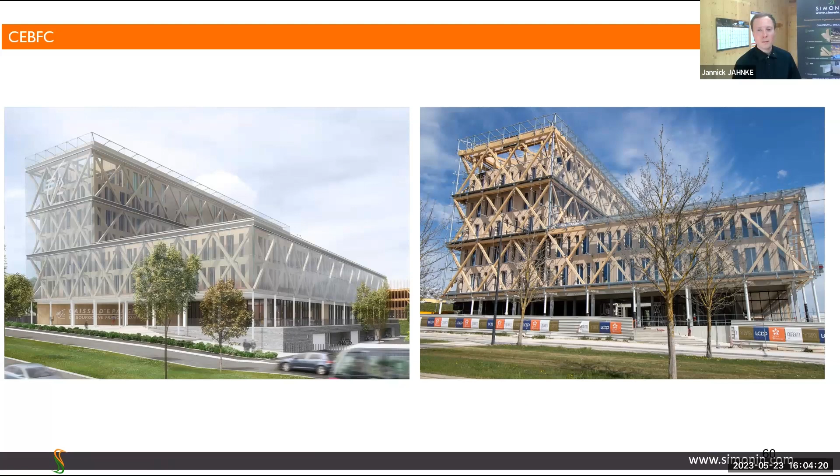That brings us to another project, which has an exoskeleton. All the outside is braced with timber. And that's a bank in Dijon in France. So we have bracing of the facade done with timber and concrete staircases, which are used also for bracing the overall building. The overall building is made out of a timber structure, timber beams, and some CLT slabs on top.

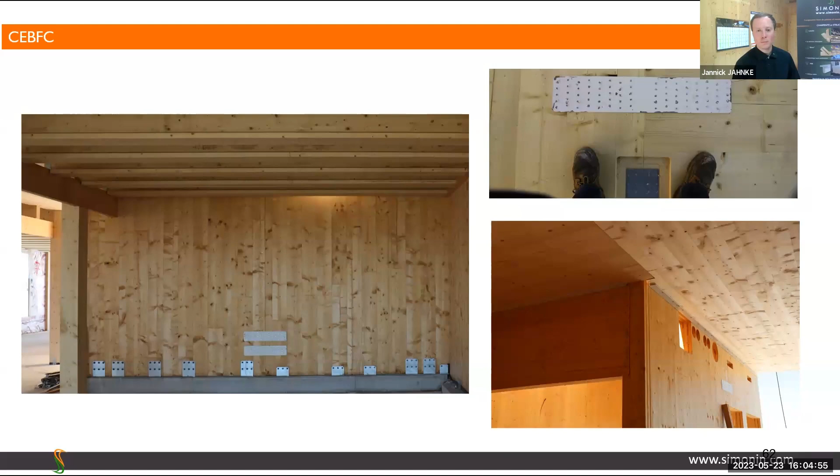Here we can see what has been shown before. All the connections are designed on the computer and installed on site. Here we've got all the steel connectors on the left picture, and also all the holes for the ducts and pipes, which are made in the factory on the bottom right picture. That was the building under construction and the inside once finished.

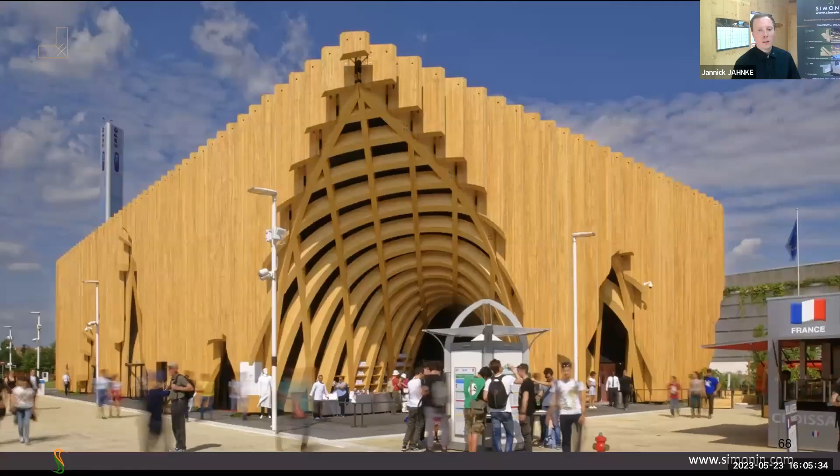The first picture of my slideshow was the French pavilion, which was used for the Expo in 2015 in Milano. This was a nice building. It has won the first prize of architecture of the show. All made out of timber with 3 floors. So I would not even call it a mid-rise building, just 3 floors. And it has something special. We needed to have 2-hour fire resistance so that the upper floors and restaurants could be evacuated in case of fire on the lower level.

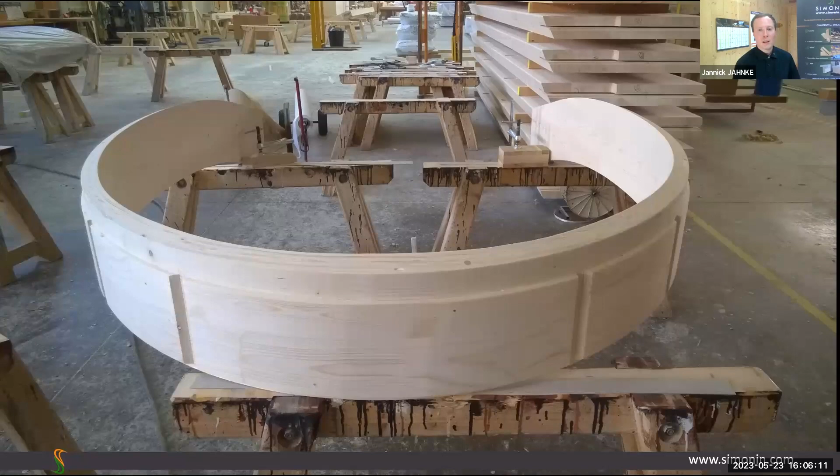Now we'll go to examples of beams and projects which are achievable with the material. As you see, with tight radius and special shapes. That's something we can do with timber. Here we've got double curved beams, and we can also do hybrid beams between oak and spruce to use the right material at the right place. So I hope this showed you the versatility of all the kind of uses we have with this material. And I guess there's a good place for it in the next years of construction.

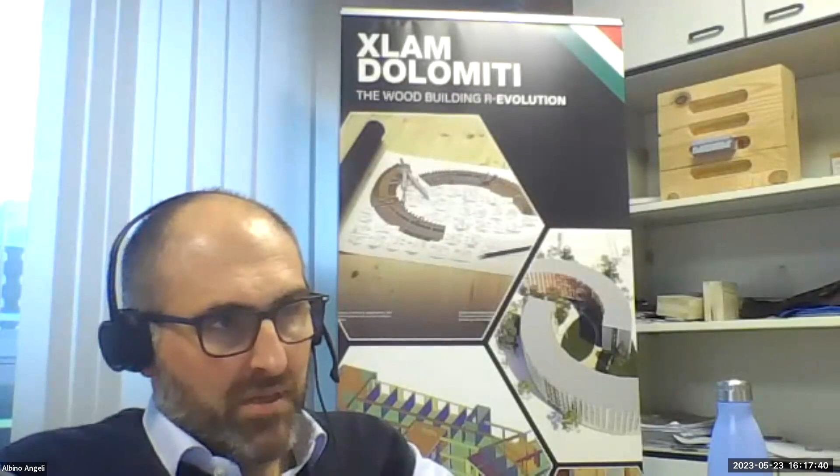And what are the other speakers' experiences in this regard? What are your reflections? Albino? For example, today in our company, the static model and software are completely separate from the BIM design and CAD/CAM. Usually we build up the model in CAD/CAM or Revit. We export to the software. We are working with 2-3 different software depending on the countries and the complexity of the building. If it's normal houses, small houses, or a multi-story building, or a very big glulam structure, we do the FEM model completely outside the BIM. And after, we go into the model, we modify some elements if they're not verified, and we define the connections and everything. Today this is another step that all the software have to do, I think.

Okay, and Jannick? In the industry 10 years ago, we were still passing PDF files from one to the other. And in my opinion, things have changed since then. And as Xurxo said, with the IFC models, things are getting better. They're still not perfect, but there's some progress. I can see it.

So what would be an ideal candidate to work at your company on design? What skills should such a person have to be employed and join the team? Albino? The first skill is a very big passion for timber construction. First, because if somebody has a very strong passion for this material, you can learn everything. Second, usually we ask for BIM experience or BIM knowledge, in Revit or others. Third, experience in the timber sector, but many times we don't find it. We start from zero in the timber sector, but with passion and with knowledge of software, nothing is impossible. Also, the language is very important.